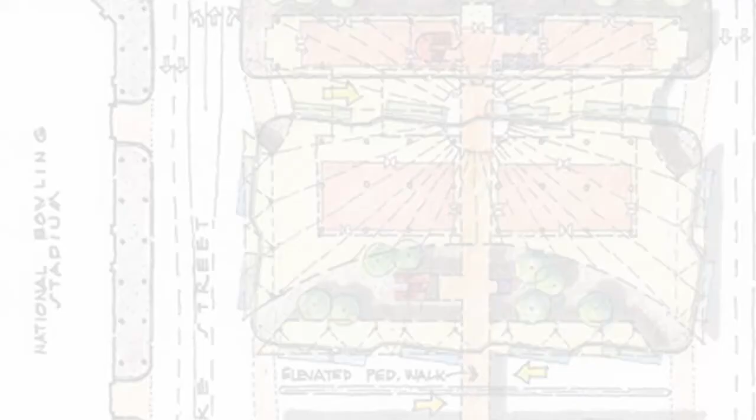So for architects and engineers, typically what we do can be defined as creative problem solving. Basically, when we start a new project, the first thing we want to do is understand what are the key issues in a project. What are the problems? Because you cannot start to solve the problems until you really understand what they are.

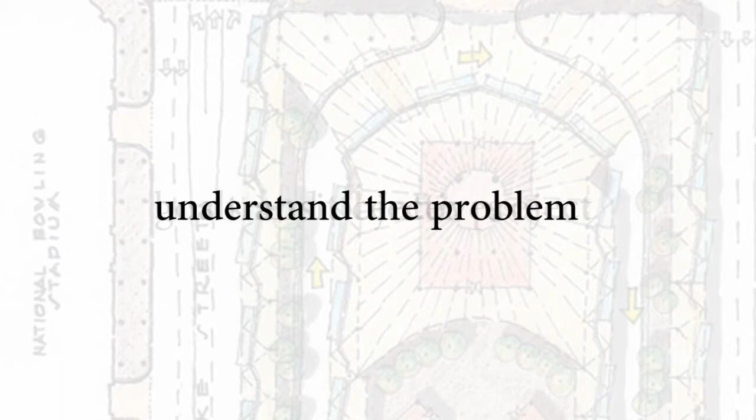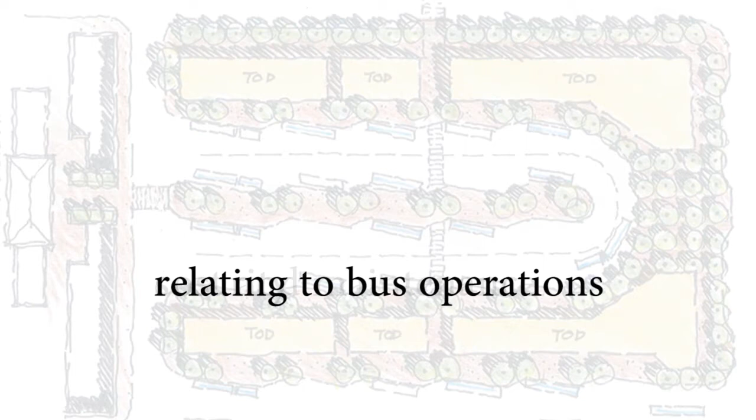So in the case of a bus transit center project, we have to first get an understanding of what are the goals and objectives of all the different users involved. These users include the transit agency, typically our client, and we have to understand that they have very specific goals and objectives related to bus operations, passenger comfort, amenities they intend to provide to passengers, or amenities they definitely do not want to provide because there may be security related issues, or costs associated with the maintenance involved with providing those amenities.

And we need to understand what are the goals of the passengers, the users themselves. How do they plan to use the facility? Where are people headed when they leave? Where are they arriving from as they come to the facility? What is the preferred process for purchasing tickets? Is it from a person sitting in a ticket window? Is it from an automated ticket machine? Is it from an online resource?

Also, how does the transit agency communicate to the users? Is this done all through electronic communications? Or is there a preference for physical pieces of paper, information cards that people can pick up and take with them? And depending on what those goals are, that will define how we organize the spaces within the transit center to provide these services.

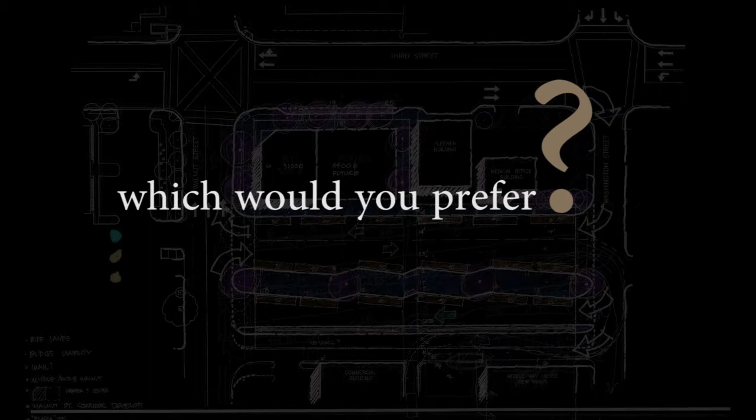Also, we need to understand what are the goals and objectives of the public, the people that are not the transit users. What type of interaction or relationship are they going to have with this project? We want to make sure that if we build a project in a downtown urban area, that we don't create a barrier, that people can still move through the site.

Also, we want to understand if there is a need or desire to provide additional amenities within the project that would serve not just the passengers but also the non-commuters or non-transit users. This is referred to as TOD, transit-oriented development. Basically a transit agency can say, as they're constructing a project, that a part of the physical building or an amenity around it may not be specifically dedicated to transit operations.

It might be an area that the transit agency could lease out to tenants, other businesses who could come in and conduct their business, which would provide a service to the transit users and hopefully to the community as a whole. We'll talk more about TOD or retail opportunities in a later section, but this is a key element to understand very early in the process because it needs to be integrated into the overall project.

Another key element of understanding this project and making sure it's going to be a success is understanding where the project is to be located. Is it truly set in a downtown core? Is it out in a suburban area on the edge of a community? Or is this a project that's going to be constructed in an area of a city which possibly has seen better days?

Maybe it's in an area which is not that great of a part of town, but people are looking for this project to be a catalyst to stimulate growth and economic activity, because a bus transit center is a very busy place with a lot of people moving in and out. Typically, over the course of time when a transit center is constructed somewhere, the area around it is impacted significantly in terms of new business opportunities, new organizations, and a new scale of the city in that area.

And we also need to understand, again from a user standpoint, who's using the project. Is it commuters just using this to get to and from work? School children transported to and from school? Is it just tourists, something close to a tourist destination? The familiarity of the system by the users has a big impact on the layout of the system itself and the transit project.

And we also want to understand what are the other modes of transportation connected to this project. Do we need to provide taxi stands, bike racks, or bike lockers? Is this going to connect to a rail type system, a commuter rail, a heavy rail metro, or a light rail metro?

Or again, maybe in a suburban situation, maybe this is integrated into a parking structure, where it would become basically a park and ride facility. So these are all elements that we need to understand before we can move into actually designing the project.